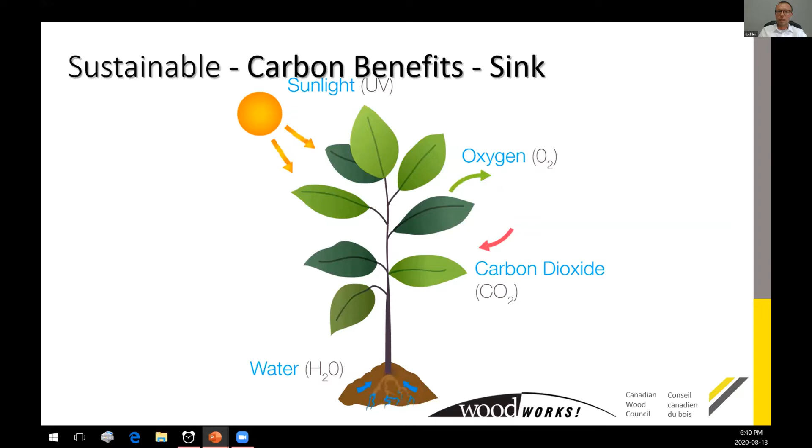As the trees grow, they absorb CO2 and release oxygen. It's important to remember that trees have a life cycle like any other organism. So if they die through natural means like insects, fire, or wind, they slowly decay and release the carbon that was stored. In fact, far more trees are destroyed through natural means than are harvested through forestry. It's not even close. So some forests are naturally actually a carbon source because of the decaying trees in nature.

If we can harvest them at the proper stage and replace them with young trees that absorb more carbon, we have a nice cycle that will allow us to produce building materials that will have this carbon stored for the life of the building. By ensuring the trees are replanted, the cycle will continue.

So why do we need to focus more on sustainable building materials? The population of the Earth right now is 7.5 billion, but projections say by 2050 we may have as many as 9.5 billion people on this planet, which is staggering, as you know, only about 60 years ago the population was approximately 3 billion people. So everyone needs places to live, to work, and to play.

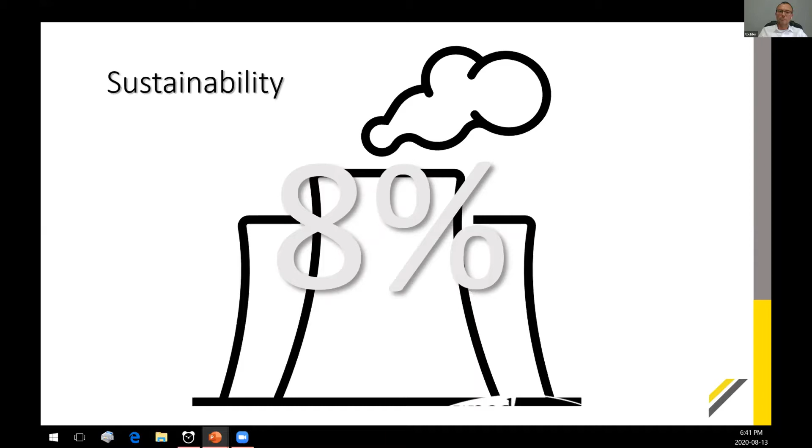In construction, concrete production is currently responsible for about 8% of the world's CO2 emissions, not far behind huge industries like agriculture. In fact, if concrete production were a country on its own, it would be in the top 5 producers. To put this in perspective, before travel lockdowns, the entire aviation industry was only responsible for about 2.5%.

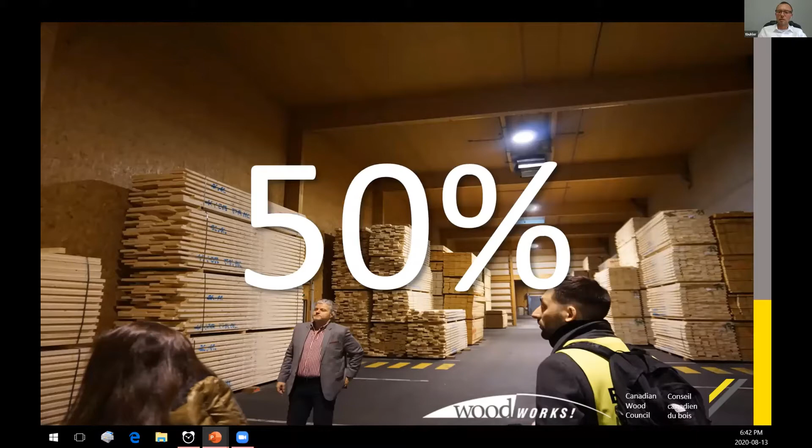The climate reports are out there, the evidence is crystal clear. So we've got to change the way we're building to keep up with these demands on the planet. Wood's dry mass is actually 50% carbon, so the more carbon we can retain in buildings, the less that's released into the environment, and perhaps this will lessen the impact of climate change, at least in the built industry, doing our part.

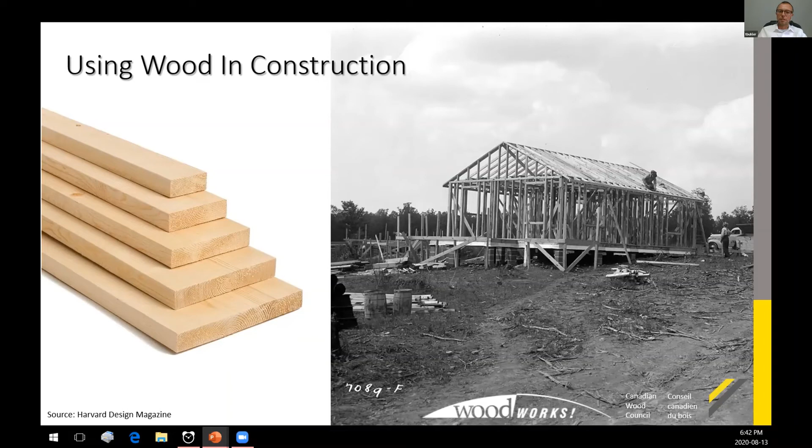Let's talk about using wood in construction and how we got to mass timber, which we're going to be talking about in depth tonight. Historically, we have built with wood because it was readily available, easy to work with, lightweight, and easily transportable. We started building with sticks, classified as dimensional lumber, 2x4s through 2x10s and so on, with planks used for sheathing. This worked reasonably well, but there were size limitations, and it's a very labor-intensive process, very much piece by piece.

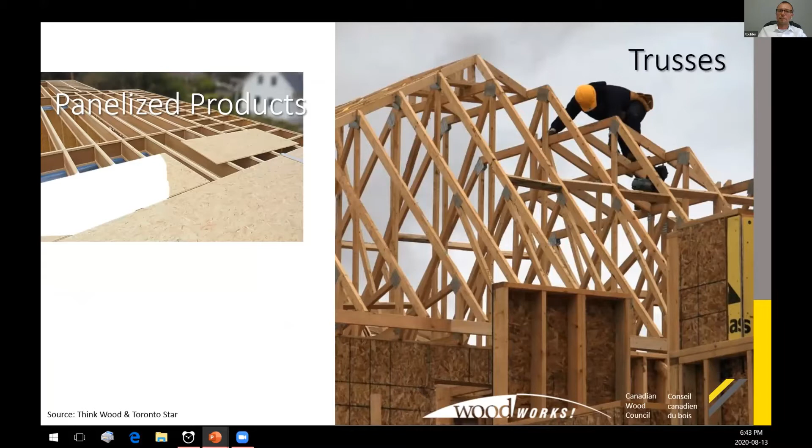So wood has developed along the way. Different products like engineered trusses allow us to achieve longer spans and have greater strengths. Panelized products like plywood and OSB allow us to cover our buildings more quickly. And engineered products like I-joists and other structural composite lumbers allow us to achieve greater spans and have stronger members.

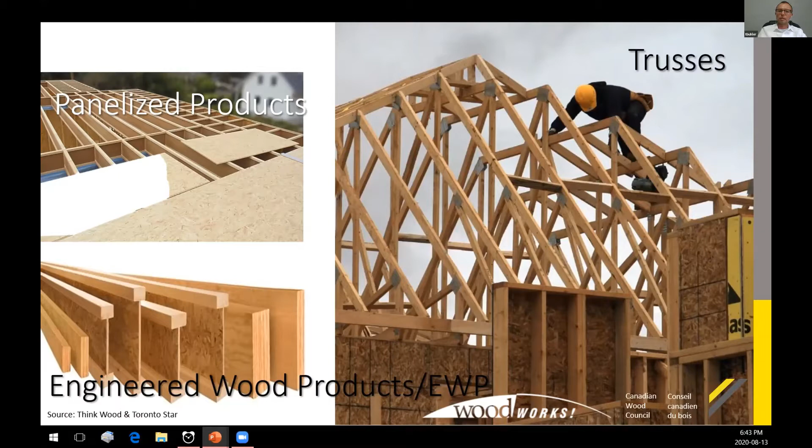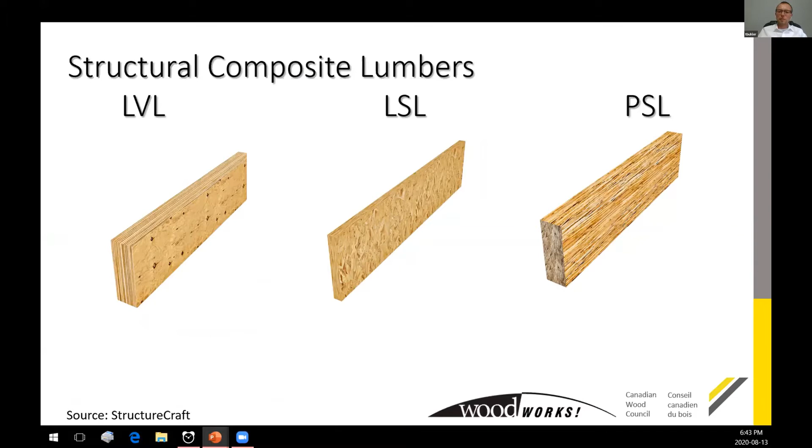Something worth mentioning, not generally included in the mass timber family or main players, are the structural composite lumbers, or SCLs - laminated veneer lumber, parallel strand lumber, and laminated strand lumber. It is somewhat of a mass timber product on its own that has a variety of advantages: they can be made to unlimited lengths in production, much lower moisture content and less prone to shrinkage, greater strength to weight ratio, increased resistance to fire, and less wasteful.

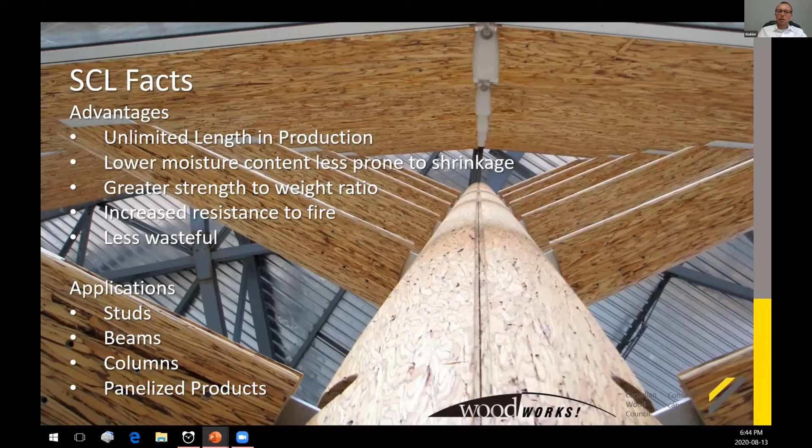You can only get so many 2x10s out of a round tree, but these structural composite lumbers use smaller pieces. These can be used in applications like studs, beams, columns, and panelized products. These have evolved over many years until we've kind of reached a maximum size with these types of products as well.

So this leads us into the mass timber discussion. Catching momentum in Canada and North America in recent years, this has been a popular type of construction since the early 90s in European countries, and even some examples in North America that we'll get into. But it's not quite as new as many people think, but certainly gaining a lot of popularity.

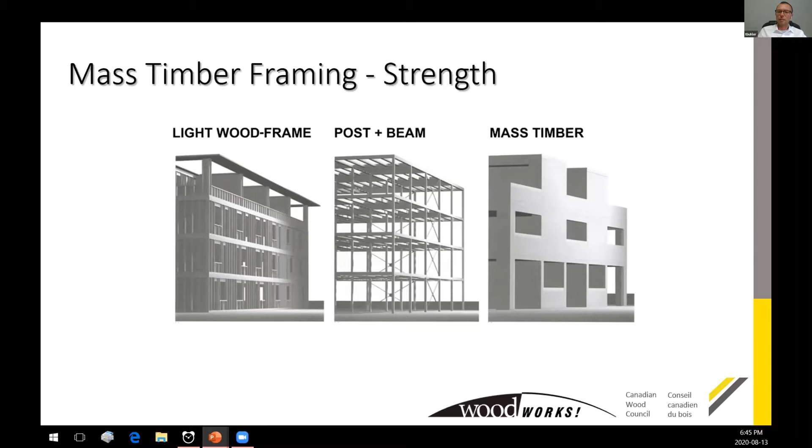The two main characteristics of mass timber that allow us to build these larger and taller buildings are the strength and the fire safety performance. The larger members have a greater load-bearing capacity than any dimensional lumber that we see. So wood, when exposed to fire in a mass timber application, behaves a little bit differently.

When exposed to fire, the outer layer will slowly burn, but it creates a natural protective charred layer. The char layer acts as insulation, which delays the onset of heating of the wood in the core that's making up the structural capacity of the building. The char will form at a very predictable rate of about 0.64 millimeters a minute, which will slow combustion and allow for evacuation. So you can easily design a sacrificial char layer into your building to ensure that you meet the fire resistance rating prescribed in various building codes.

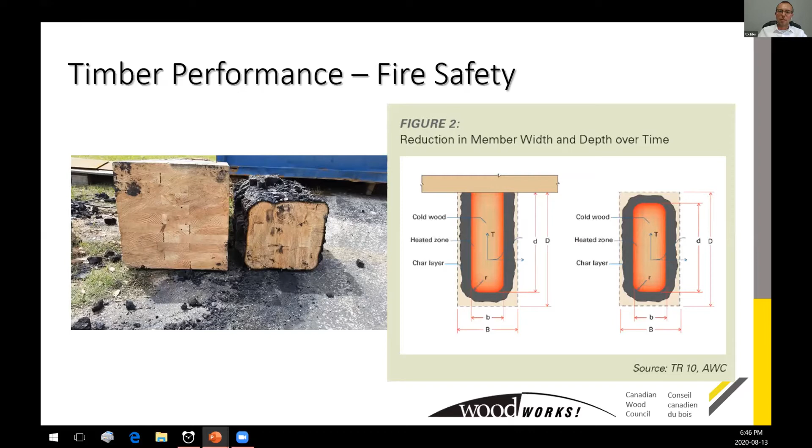Let's quickly get into the common mass timber products that you'll see. Glue laminated timber, typically known as GLT now, as most of these products will fit into a three-letter acronym. Glulam is composed of individual wood laminations specifically selected and positioned based on their performance characteristics, and they're bonded together with durable moisture-resistant adhesives. The grain of all laminations will run parallel with the length of the member, and the laminations reduce natural defects and mitigate some common challenges with wood construction.

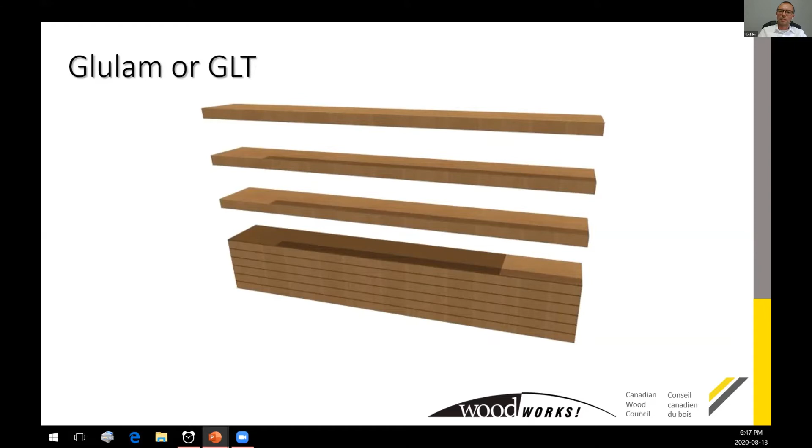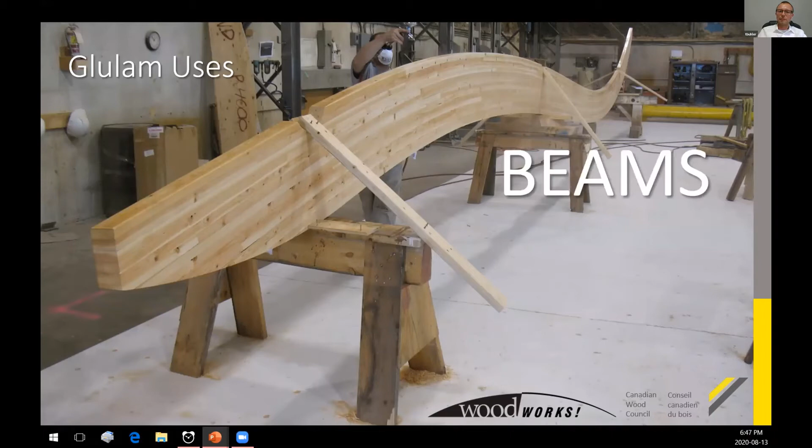GLT has been around a bit longer than some of the other products, typically used in showcase public buildings. I'm sure all of us at some point have been in an atrium or public space that has some glulam post and beam construction. Glulam has excellent strength and stiffness properties, can be made in a variety of layups, including curvatures as you see in the photo, and can be used for beams, columns, decking, and other applications. In fact, this particular project highlighted here is a glulam arch in Richmond, BC, part of the Olympic speed skating oval building that has a 100-meter clear span.

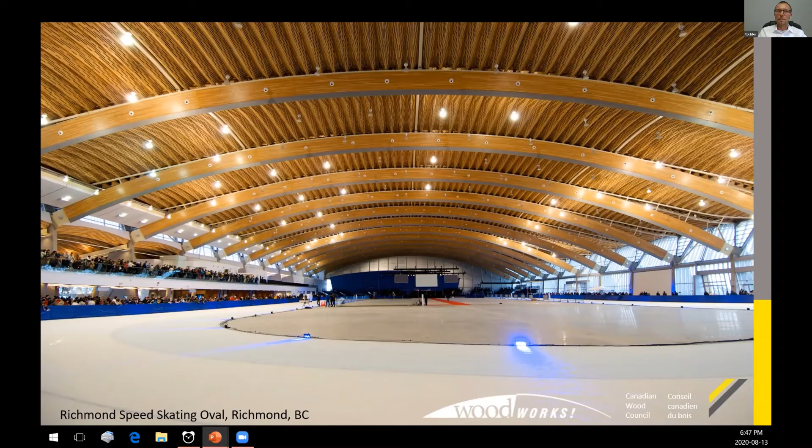The next product is cross-laminated timber, or CLT. It's an engineered wood panel, typically consisting of 3, 5, or 7 layers of dimensional lumber oriented at right angles to one another, and then glued to form structural panels with exceptional strength, dimensional stability, and rigidity.

The alternation of the laminations allows for strength in two directions, much like a concrete plate can offer. The odd-numbered laminations offer the greatest strength. This has been around for 30 years or so in Europe, and recently appearing in North America. Because of its ability to span in two directions, it's very well suited for floors and roof structures, and for mid-rise and tall wood construction.

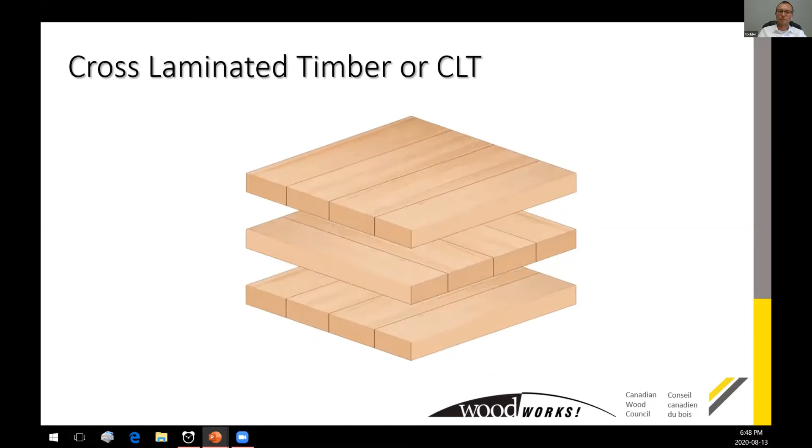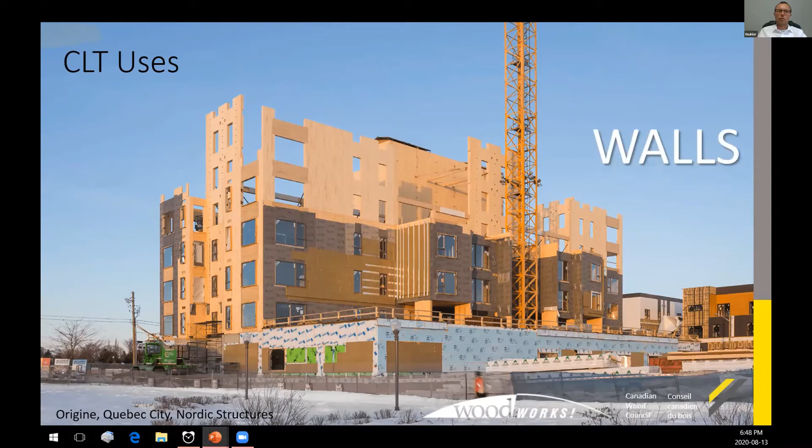This is an example of a building in Quebec City that is made entirely out of CLT, from panels as much as 9 plies in thickness. It was used for the walls, the floors, the roof, elevator shafts, and shear wall applications.

Nail laminated timber, or NLT, is actually over a 100-year-old construction method that is undergoing a design renaissance as part of the mass timber world. It can be found today in many historical buildings, especially in the Toronto area, in all shapes and sizes, with heavy timber post and beam construction, using nail laminated timber as a floor structure. This is just dimensional lumber nailed on edge. Obviously, it used to be nailed by hand in place a century ago, but now sophisticated nailing guns and automated machinery allow it to be manufactured to spec in a factory setting.

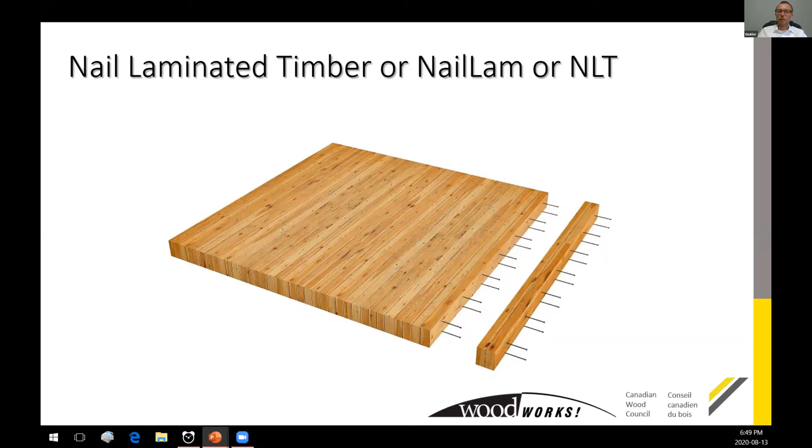A similar product to NLT with one important difference is dowel laminated timber, or DLT. Currently, this is the only all-wood mass timber product. Hardwood dowels are used with the softwood boards to friction fit the panel together, so it's particularly efficient for horizontal spans and allows for a lot of architectural flexibility. With no metal fasteners, the panels can easily be processed using CNC machinery, creating a high tolerance panel, which can also contain pre-integrated acoustic materials, electrical conduits, or other service interfaces.

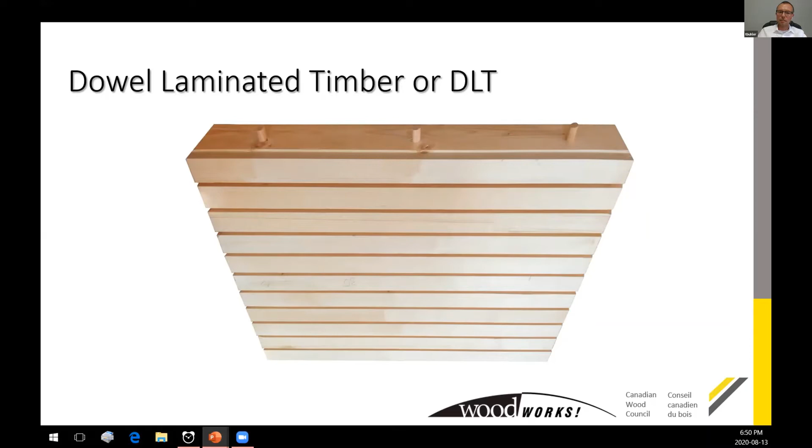This is currently just manufactured by StructureCraft in Canada, in British Columbia. Again, these panels can be used for floors, walls, roofs, and elevator shaft applications.

Now that we've learned a little bit about some of the mass timber products, when we look at the possibilities, it's really endless. If you can panelize these wood members, they can act like large plates and have two-way capacity if required. These are highly processed products where some of the natural defects that occur in wood, like checks, splits, knots, etc., can be removed and controlled, and the quality of the finished product can be assured. Moisture content can be monitored in the factory setting to mitigate shrinkage to a large degree.

Since you can CNC most of these panels quite easily, connections for MEP can already be installed and prefabricated. They can be shipped to a job site, due to their much less weight than steel or concrete, quite efficiently, and craned into place immediately. Now, suddenly you can erect the entire floor of an office building in a week with no formwork required, no rebar, or hundreds of concrete trucks. You don't have to wait weeks to strip the formwork, and you don't have to reshore.

You can use large portions of the structure for the finish and eliminate costly and time-consuming application of gypsum wallboard, and you're all set to go with a really beautiful looking project.

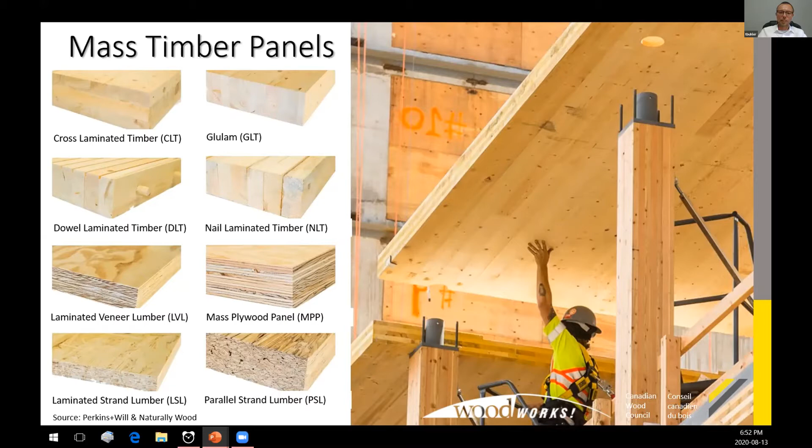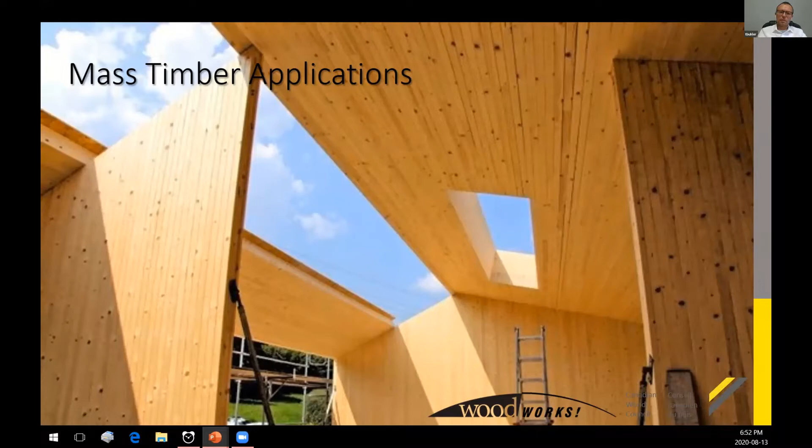A lot of people think we're trying to stretch skyscrapers out of wood, which are great, but many of these buildings, which I'll just flip through quickly, fit within the prescriptions of existing building codes, like a toy store, a furniture store, a grocery store, libraries, community center pools, office spaces, and even warehouses. So this allows us to have a lot more flexibility and a lot more types of buildings that we can really be proud of.

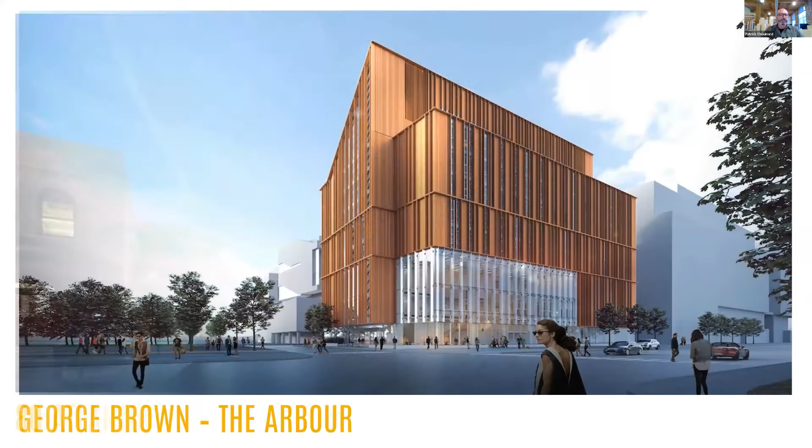George Brown College is building a 10-story building on the Toronto waterfront. The University of Toronto is building a 14-story building. Centennial College is building a 6-story building, and I'm sure Mark will talk a little bit more about this building since EllisDon has the contract for it.

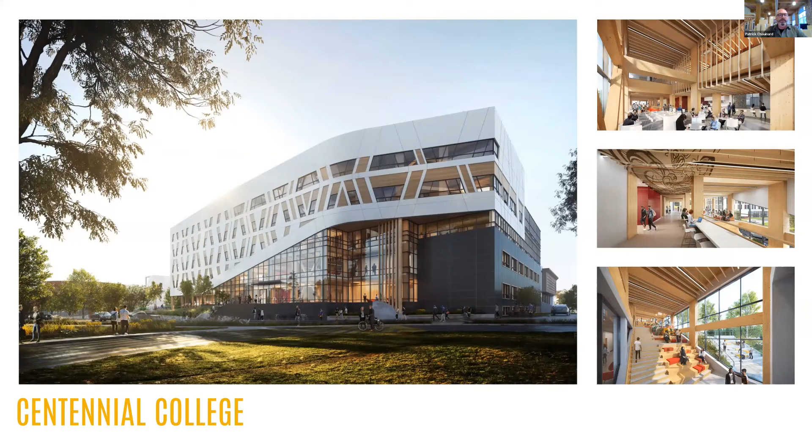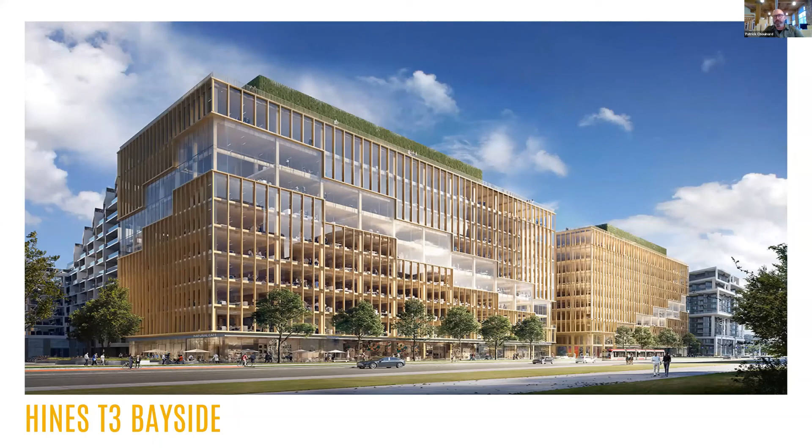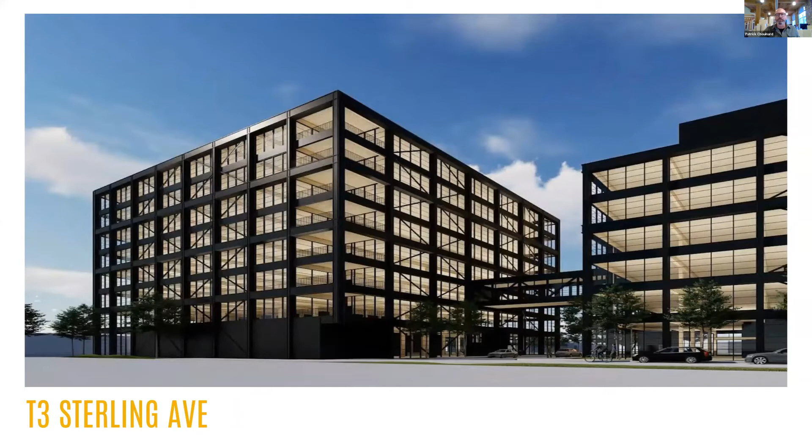So why all the interest in mass timber? Well, it really depends on who you're asking. If you're speaking with owners and developers, it's all about return on investment. Mass timber buildings have the propensity to be built at lower cost, and in addition, tenants are willing to pay a premium to be in these absolutely beautiful buildings. So the fact that you can build them at lower cost and get a higher premium means owners and developers are getting a higher return on their investment. Speed of construction, certainly - referring back to the Brock Commons building that was completely weather-tight in 9.5 weeks - the structure of these buildings goes up more quickly than conventionally constructed buildings.

In addition to the site work being done on a building, mass timber buildings are being constructed in a factory at the same time. When they're shipped to site, they're assembled rather than being constructed on site, so they go up much more quickly.

If you speak to the environmentalists, as Tim mentioned, it's all about the environmental benefits—carbon sequestration and using natural, renewable, sustainably harvested materials.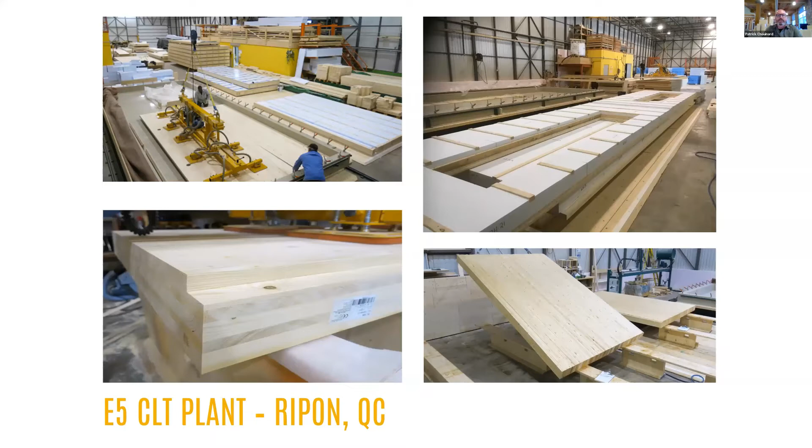So I was asked to talk a little bit about Element 5. We are a startup company, essentially. I started the company at the end of 2016, so we've been operational for less than 5 years.

One of the first things we did—fortunately we were able to buy the assets and all the equipment of a small CLT manufacturing company located in Ripon, Quebec, about an hour due east of Ottawa. It's a small facility, about 13,000 square feet.

This is CLT manufacturing 101. If you look at the top left-hand corner, you'll see a vacuum press—a bed where you lay the materials. You have automated glue applicators that put glue on the surface, then a rubber membrane that you drape across the bed and fasten down with fasteners around the outside, then suck the air out, which creates compression on the panels until the glue sets.

With this process, we can only manufacture about 3 panels per day, so it's a pretty slow process. Then we pick up the panels with the overhead gantry you see there, move them to other parts of the factory, and hand frame everything—using hand tools basically to cut everything to size and shape.

We quickly learned in this industry that there are very few architects and engineers who know how to design and engineer mass timber buildings. So we realized that if we wanted to ultimately sell something, we had to handhold these projects from early stage design through to the point where we could actually manufacture materials.

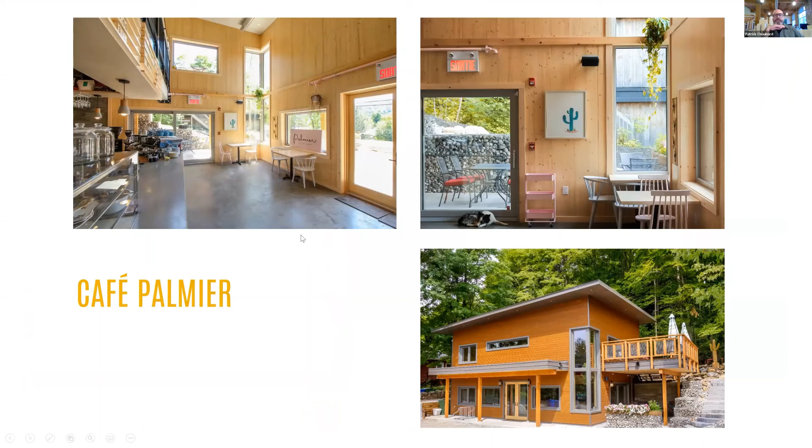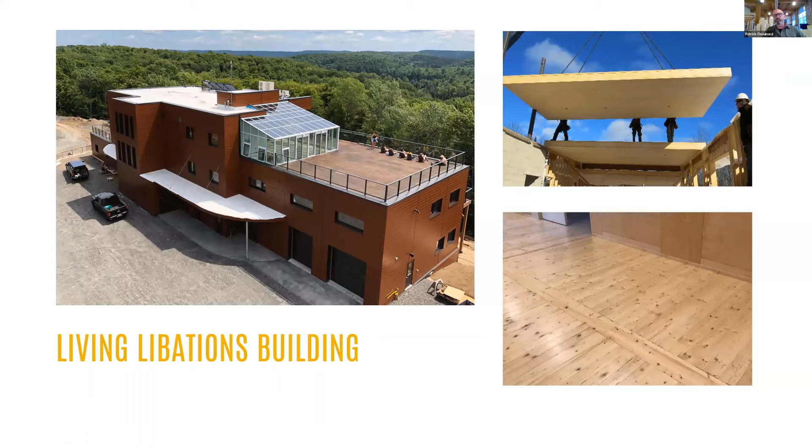This is called the Living Libations Building. One of the challenges with CLT is if you have to span long distances between structural members, you have to increase the thickness of the CLT considerably, and if we were to have sold strictly CLT for this project, it would have been cost prohibitive. So we came up with what we now call box panels. They're hollow core CLT panels with a CLT slab on the bottom and top, and an engineered joist in between, so these panels are actually hollow inside. They're actually stronger than CLT, and because they're hollow, it's a solution that's much more cost competitive against concrete.

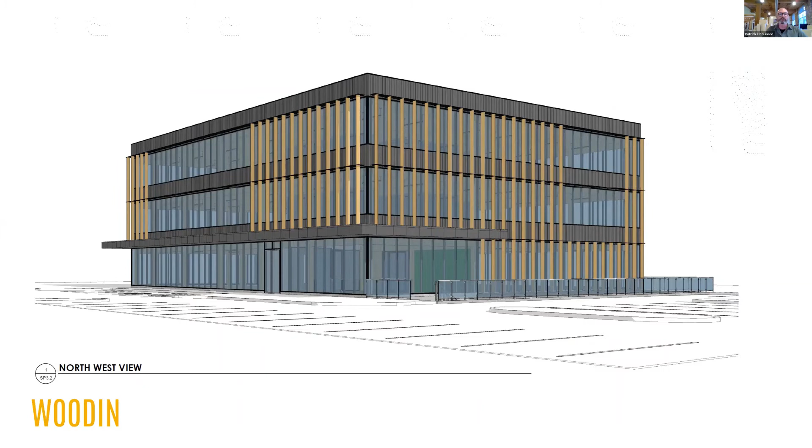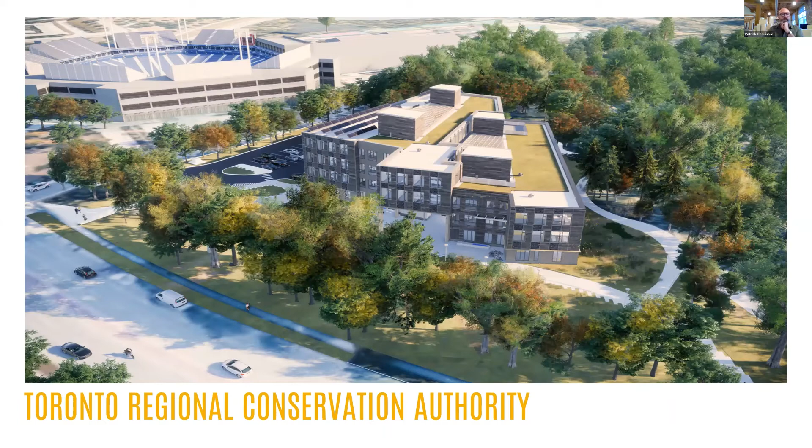We continue along the vein of selling into First Nations communities, and this is an Aboriginal healthcare center in London, Ontario, which we are delivering again this fall. The largest project we have won so far is the Toronto Regional Conservation Authority—an 80,000 square foot post and beam structure—and we are delivering and erecting it in mid-November of this year.

We had always had our sights set on a larger building in Ontario for the larger market space. We honestly believe Ontario will become a center for the mass timber industry, at least across the whole eastern half of North America. We see tremendous opportunities to sell buildings into the central United States and the whole eastern seaboard, so there are many opportunities currently in our pipeline.

About 2.5 years ago, we started working on the construction of a new plant. These are photographs taken just the other day. It's a 133,000 square foot building, with a capacity of about 45,000 cubic meters of CLT and 5,000 cubic meters of glulam—the equivalent of about 8 Brock Commons buildings per year. It will employ about 50 people directly and create about 240 jobs in related manufacturing, sawmills, transportation, and logging sectors.

So again, thank you very much, Nick and Raymond, for the opportunity to present. I will be in one of the breakout sessions, I think room 3, and look forward to answering any additional questions you may have.

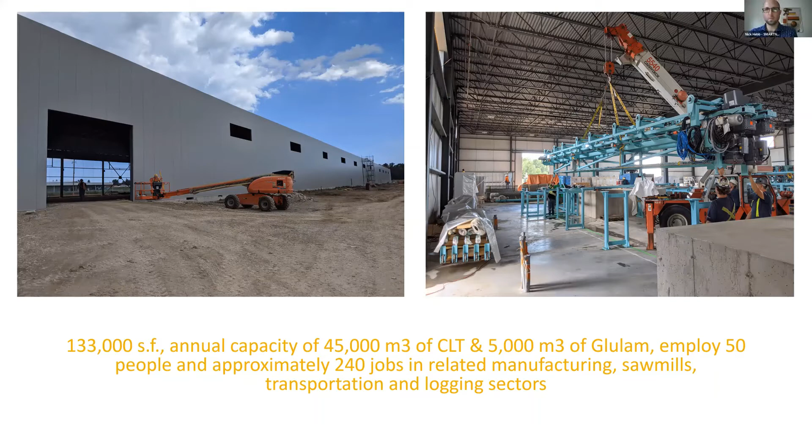Thanks so much, Patrick. We're going to put you in room 2 for that. But it's nice to hear about what you're doing with Element 5—congrats on the new factory. Some amazing projects there. We certainly hope to see it expand across Ontario and across Canada. It'd be nice to get a project in Ottawa. And it's fairly ironic that you're doing some of the fire halls too—who would have thought they'd start building those out of wood? Fabulous looking projects, and looking forward to hearing more about what you're up to in the breakout room. All right, thank you very much.

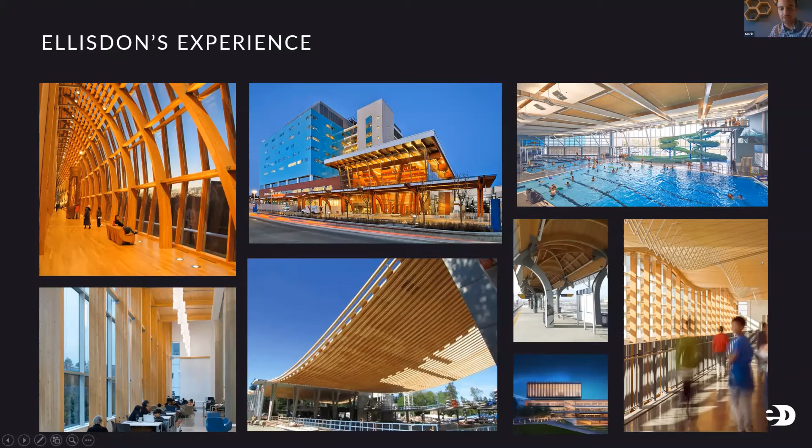Then some things started changing around the 2014, 2015 time period. A lot of that had to do with building code, and a lot of that had to do with the supply chain as well, including Patrick's company and some others. So that's where we were up until about 2014, 2015.

So what's happening now at ELLISDON? I'm on the construction scientist team. We're kind of like the R&D engine of the company. We're supposed to keep this big construction company at the cutting edge of emerging technology and what's coming down the pipe. And of course, we got the call on mass timber and we had to try to figure it out. So where we brought the company to today, from doing a lot of that small boutique stuff, here's what's going on to date.

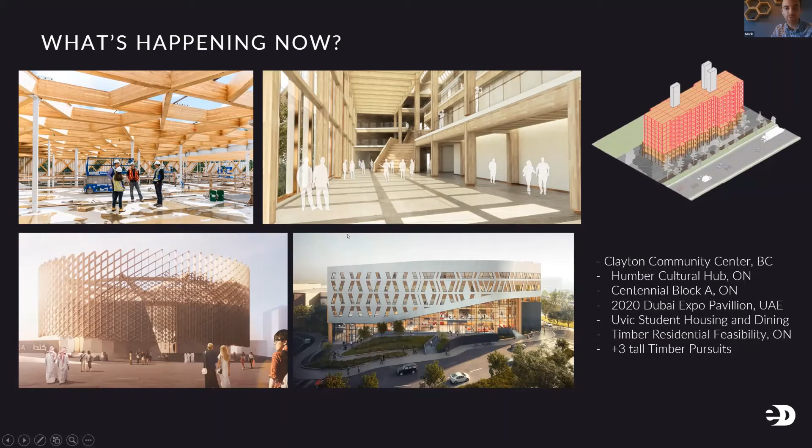So lots of mass timber. These are the ones that are unveiled to date. Lots more in the pipeline, very interesting pursuits and research projects on the go with partners around the country and around the world. So that's what's happening now. As you can see, we're moving from that boutique kind of setup into something more ubiquitous, where we're just replacing where you would traditionally use steel or concrete. That's really the trend around the world. These are all real buildings, and the numbers here indicate how tall they're going. So we're feeding the lower rise stuff, while at the same time inching upwards into some of the other markets which have traditionally been entirely dominated by concrete and steel. There's a number of reasons for this, which the other presenters eloquently went through. Tim did a great job of explaining the acronyms.

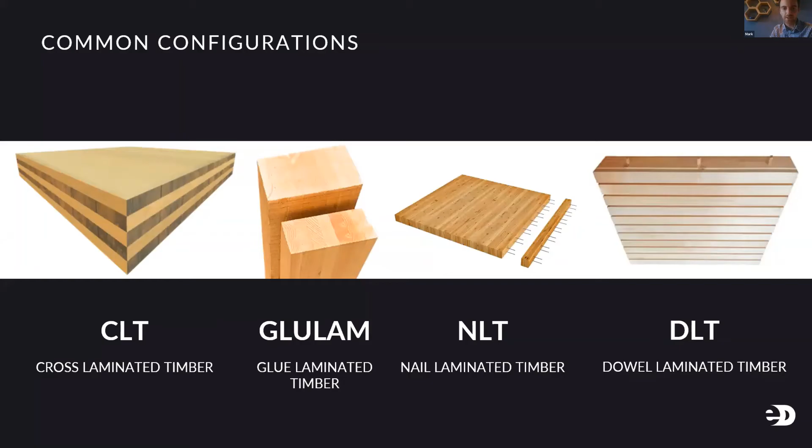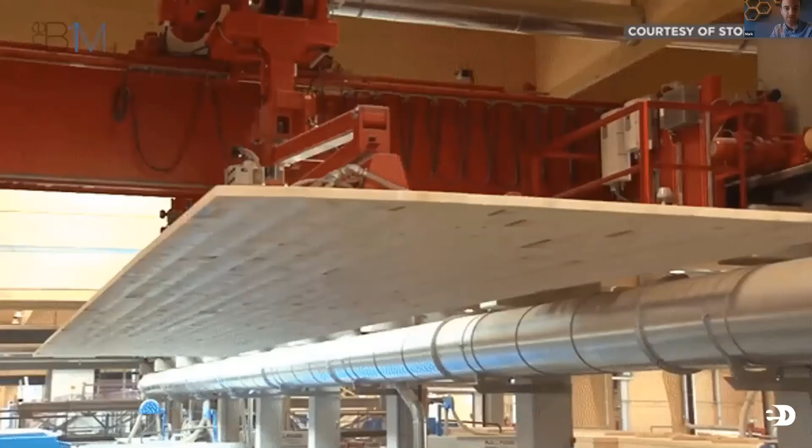We won't have to do that here, but I wanted to show you how this stuff is made. It all kind of starts similar to what you'd think of as dimensional lumber you'd get at a hardware store - small pieces, but then those are assembled into larger pieces, stacked layer by layer.

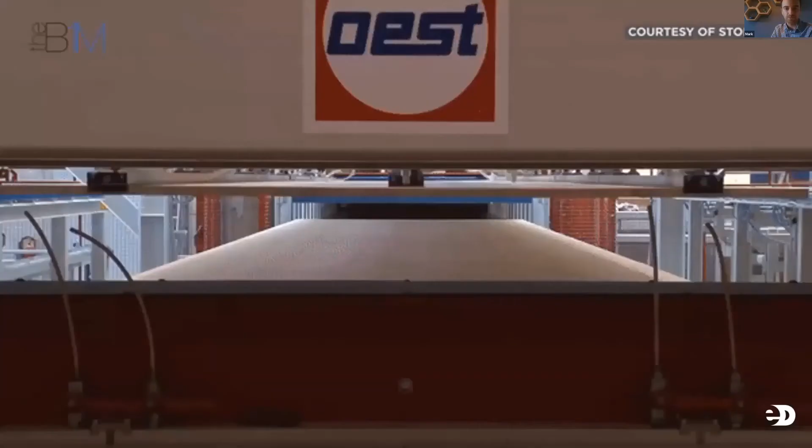This is what's going on inside the plants that produce this stuff. You can see glue layers go in between. This element we're watching is like a piece of CLT, the cross-laminated stuff. It gets put into a press, and shortly thereafter comes out - now essentially what we've done is assembled all of these small pieces into a bus-sized piece of wood, which can be used in all sorts of applications.

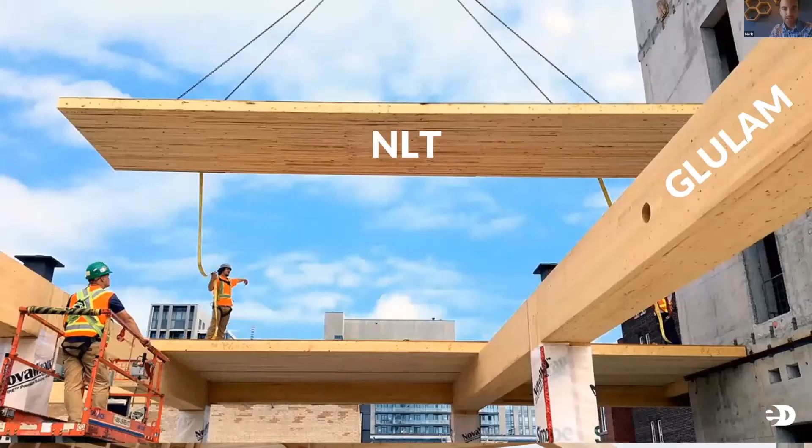Important to note, these products are always used in combination where they make the most sense. Cross-laminated timber happens to be pretty good as a floor panel and shear walls. Glulam is very good axially, just because of the orientation of the grain. NLT as well, used in combination with other things. You'll notice in the back of this photo a big concrete core.

It's important to note that just because you're doing a timber building doesn't necessarily mean it's all going to be timber, or that it should all be timber. We don't have to necessarily be purists about this - there's a lot of good reasons to use different materials where they make the most sense. This was a case in Toronto where they used a concrete elevator and stair shafts.

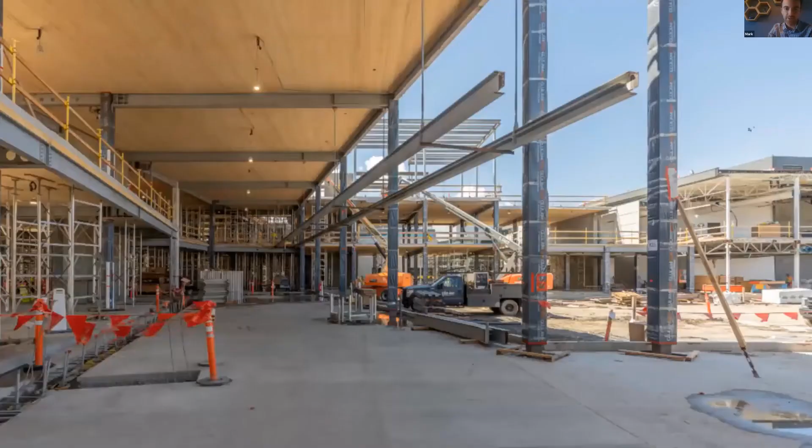Hybrid buildings make a lot of sense too. This was the completion photo of what Patrick showed earlier, the one he built on Golden Avenue. Steel hybrids are very common in certain parts of the world and becoming more common here, and there's good financial reasons for that, as well as some other considerations around headroom, material availability, and supply chain constraints.

It's just good to keep in mind that we're kind of adding a material to the menu that you can select from. You don't necessarily have to choose one though - there's good sense in choosing a few for certain applications. Happy to get into the weeds on that if anyone wants to chat later.

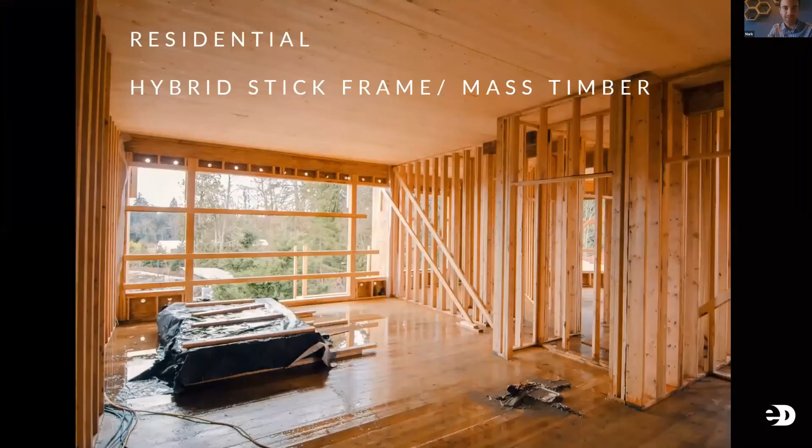Also, it's not reserved for big buildings or commercial buildings. There's a lot of mass timber entering the more traditional light wood frame world. So in this photo here, you can see a 6-story residential building on the West Coast where normally we'd see 2x4, 2x6 walls, and also TJI wood joists across the ceiling in a conventional kind of wood construction of a residence.

This was an application where it was a little bit of a remote job - this actually wasn't an EllisDon job, but the developer swapped out all of the horizontal elements for mass timber, which enabled them to stand up the walls prefab and throw down all of the mass timber much quicker than you'd be able to assemble TJI joists. Things like that can start making sense depending on labor availability and your proximity to different suppliers. But there's lots of good applications in the residential world at all kinds of densities, even down into the 4 and 6 stories.

So the rest of this series of slides is just a bunch of considerations. I sit at the contractor's perspective, so we see projects holistically and the things that matter to our clients holistically. I'll try to run through some of those and how it really impacts the construction process.

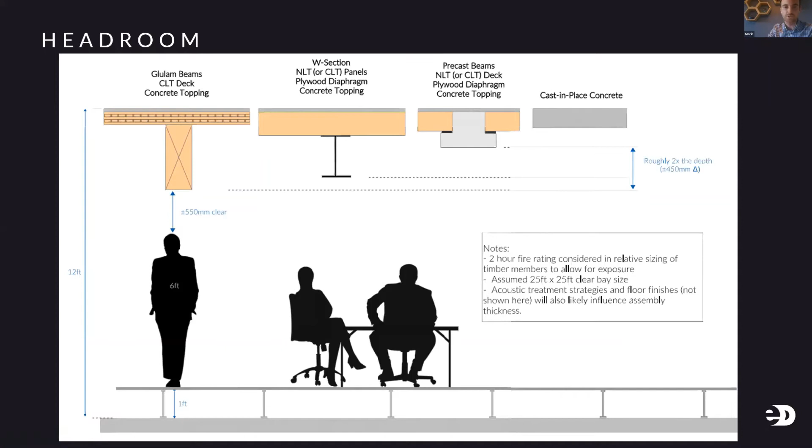So things you would want to think about if you're conceiving a job: headroom. There's a lot of systems out there - I'm only showing a few here, but there's a half dozen others easily. The depth of the system sometimes matters to the client, and depending on the system you choose it could change the depth of the system overall, which is something to think about.

The grid spacing - there's a lot of different options, I would say, here. There's box panels, whether you do CLT or glulam floors would also change this grid spacing. It's just important to note that there's an optimization exercise that generally has to take place before you conceive things like your grid.

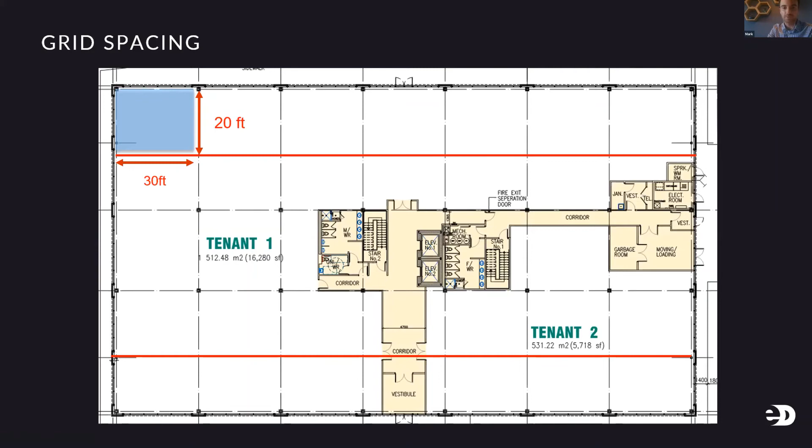If you just select a grid, you won't necessarily be optimized for one product or another. So it's good to have all your objectives at the table, and you can start pulling in those key stakeholders that can advise on what makes the most sense. If the grid shown here fits well for steel, that would give you the best bang for your buck for steel, but different grids might give you a better price for timber or concrete, or vice versa.

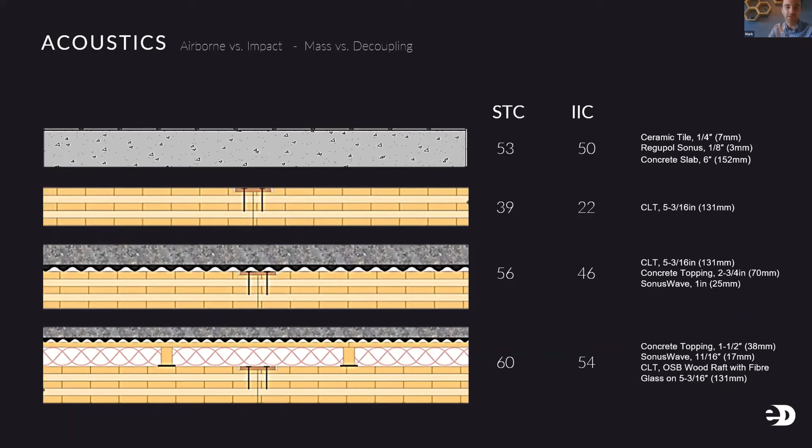Acoustics wasn't mentioned too much so far, but it's a very important issue in the mass timber world, simply because people love seeing the wood. And if the wood is also the structure, you're left with treating acoustics elsewhere, and oftentimes that means above the wood, on top of your floors. So we end up looking at a whole host of different systems, from toppings to membranes to what we call the concrete topping, like a wet trade. You pour it wet, but there are also dry options out there that can be effective and cost effective even. Acoustics are a challenge, especially in residential, because if you want to see wood in your bedroom and there's a bedroom right above it, we need to make sure you're also not hearing when the person above you gets up out of bed. So those are a couple of considerations.

We talked about how controlled and precise it is. The nice thing is, we build a lot of concrete buildings traditionally, and there's this conversion step where the architect usually designs everything in 3D, but then translates it down to 2 dimensions so that someone on site can read the drawing and build the formwork. And then the formwork translates it back to 3D. So there's this conversion step that always takes place between 2D and 3D, and it can be a source of error and poor tolerances sometimes. The nice thing about wood is that the designers, engineers, and architects' models speak directly to these machines, so that conversion step doesn't exist, and that source of error gets removed. It's really nice to be able to design for manufacturing.

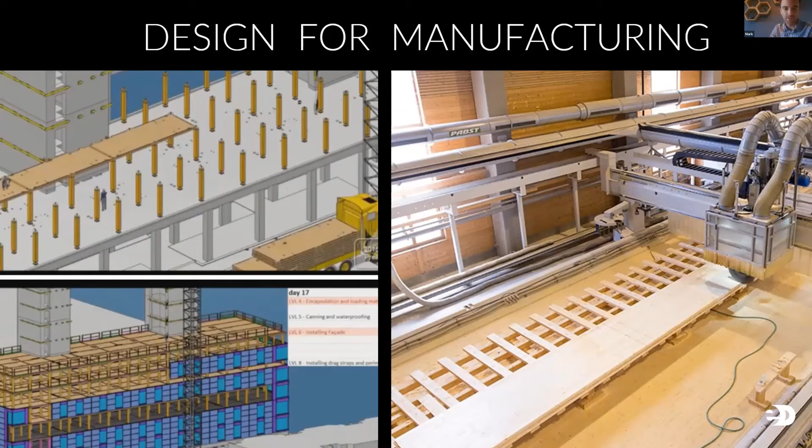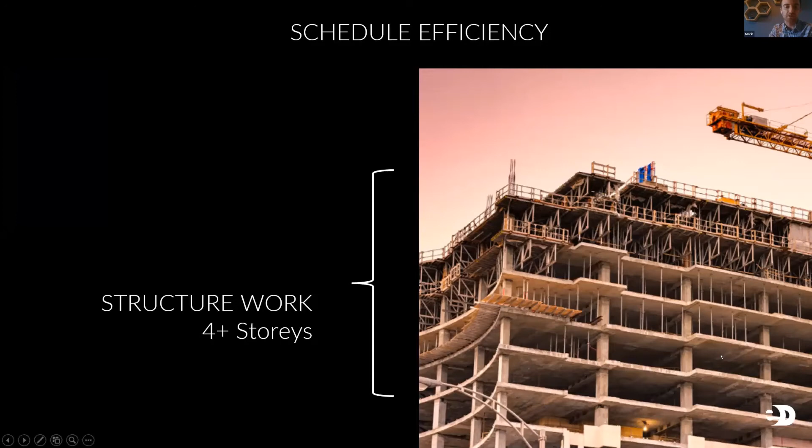Let's talk about construction sites becoming assembly sites. Here's one of the cruxes of it: in a concrete building, you have all these posts that hold up the floors while the concrete's coming to strength. You see that as you drive around different cities. With wood, you don't have that - the wood comes to site full strength. So you can start your next activity a little bit sooner, say 3 to 4 weeks sooner.

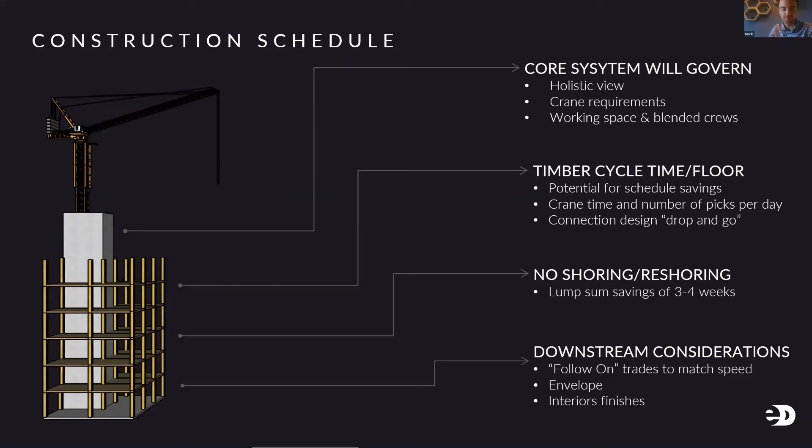This is a bit too much to go into in detail, but the point is that although wood can move really fast, it's important to speak about the whole project. How fast is the project moving? If the wood moves fast, the only way we're going to make our project actually end earlier, which is what the client really cares about, is if we find ways to accelerate everything else. The wood is probably one of the first 4 or 5 activities that happen on site - there's at least another 35 to 40 afterwards, and if they move at the conventional rate, the project's probably going to end on the same day. So a lot of our focus is figuring out ways to optimize downstream trades and find ways to move them along at a rate that justifies the use of the wood, or at least so we can capitalize on some of the speed. It's pretty straightforward though - the wood only moves as fast as your crane moves, and we can get into a lot of analysis about that.

Costs are another huge topic. It's usually the only thing anyone cares about when you start talking about the very big buildings where institutional developers are looking at bottom lines. It's very case by case - depends on what market you're in, depends on what you're building.

The important thing to know is that by switching from, say, concrete to wood, you're not just changing one line item, you're actually changing every line item of your budget. Some get more expensive, maybe your mechanical system, because you have to change your fire suppression, HVAC, or electrical system. Some get cheaper - your foundations might be lighter, you don't have the drywall scope you would normally. So it's a big balancing act, a lot of up and down arrows to determine if there's an overall cost premium. We spend a lot of our time figuring out those details.

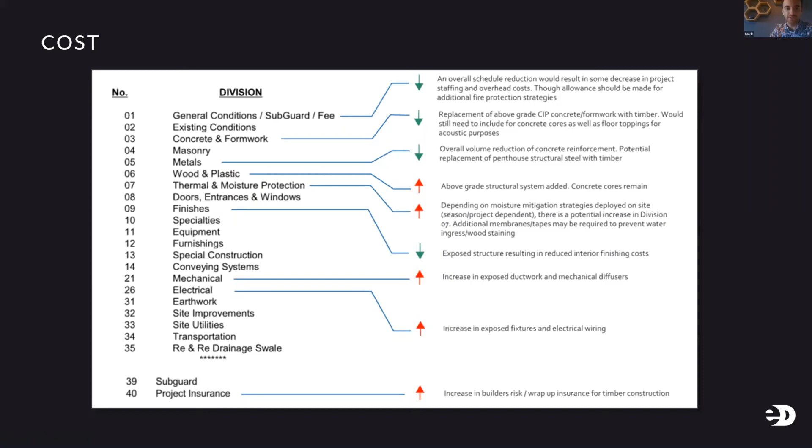I'm happy to go through the numbers with anyone afterwards. This is a little bit too detailed, so I'm going to skip over that one.

There's a lot of code implications depending on how tall of a building we want, and this varies depending on where you are in the country. But the gist of it is, if you're below 6 stories, it's a lot easier. If you're between 7 and 12 stories, there are some rules you can follow which make it easy. And if you go above 12, you're into a situation called an alternative solution, which is not the end of the world - it's been done many times. It adds some complexity and cost, but not deal breakers. There's lots of precedent being set at all of these levels today.

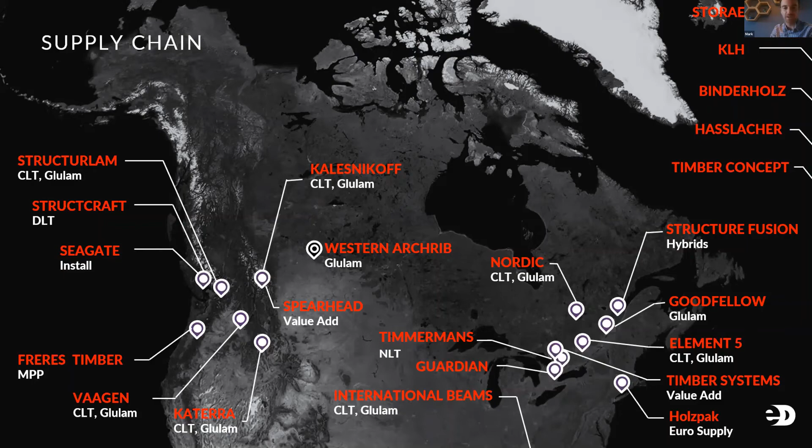Of course the European market exists, and they have some capacity and some years on us in terms of building up that capacity. So there's a lot of interesting options, a lot of projects that get supplied from Europe or a combination of domestic and Europe - a lot of interesting things we can talk about there.

So a couple last points here. How does this change your construction site? Well, we have to care a lot more about rainwater. Usually we just let our concrete structures get rained on because it's not going to do any harm to the concrete, but we have to be a lot more deliberate with how we manage water on our sites, given that they're wood structures. Why is this? Well, we want to avoid a couple of really bad things that we wouldn't want to happen, like any kind of decay or mold.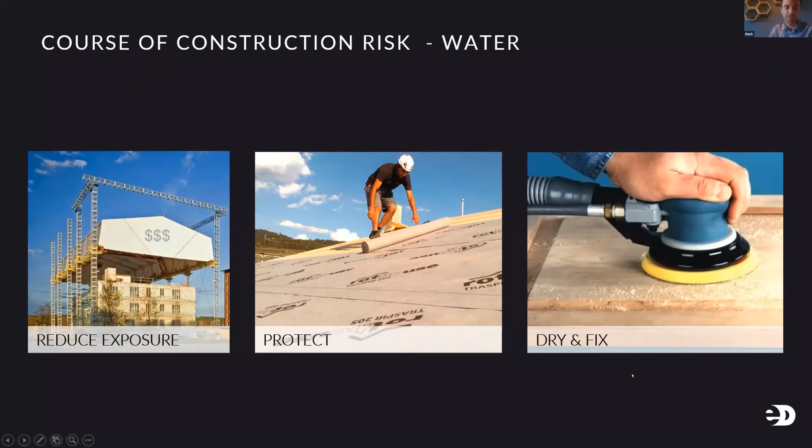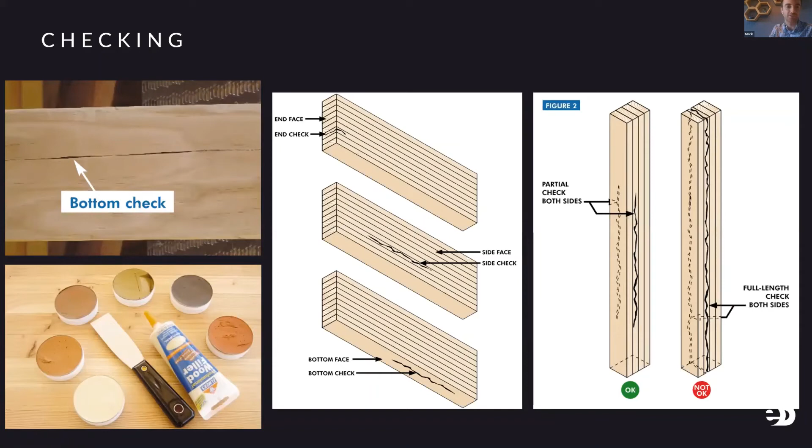Checking is something that happens in these wood buildings, and sometimes people see cracks in wood and think it's such a bad thing, but it's a very naturally occurring phenomenon in these wood products. It's not a structural issue almost 10 times out of 10, and there's all kinds of engineering, guides, and things to figure it out. You don't have to phone your structural engineer in the middle of the night to wake them up.

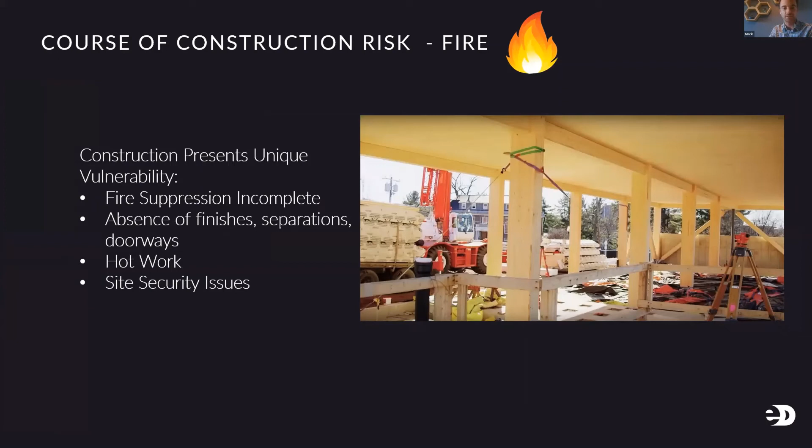Fire is another important thing on our site. We implement a number of strategies anyway, but they become very important on a wood site, like taking the welding off site and increasing security.

The last point I wanted to make was to reinforce the carbon piece that Tim brought up earlier. There are really two pieces here: Tim reinforced the stored, sequestered carbon in the wood, which is a good thing we want to maximize. The other piece is embodied carbon. It doesn't matter what material we use, steel, concrete, or wood, there's an associated embodied carbon piece with it. It takes energy for sawmills, trucks still driving, there's a carbon penalty to that. The point is that the embodied carbon of a single element of wood, like an equivalent column, is significantly less than equivalent steel or concrete.

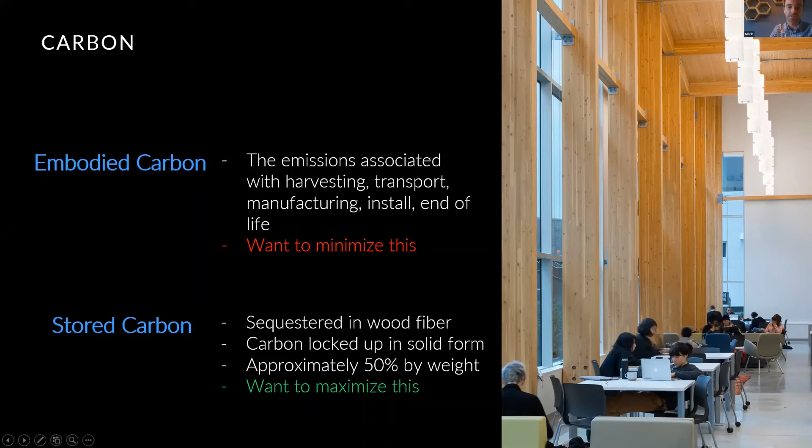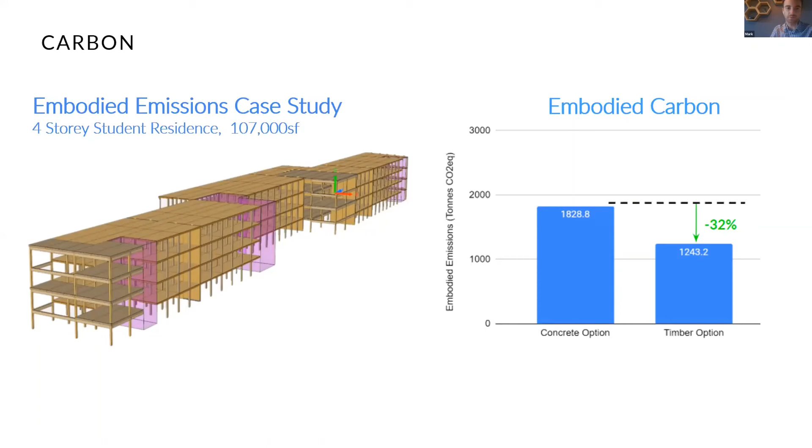So how much less? What's the issue here? We've done a whole bunch of life cycle analysis on this at the building scale, taking into account a lot of things. It comes out to about 30% less embodied carbon alone, and this is ignoring the sequestered benefit raised earlier. So even without taking advantage of that sequestered number, we still come out ahead on a carbon balance. That's important, and something we reinforce to clients considering this. This is an example of a building where that calculation made the difference between selecting a wood system versus an alternate. It's becoming more and more important moving forward.

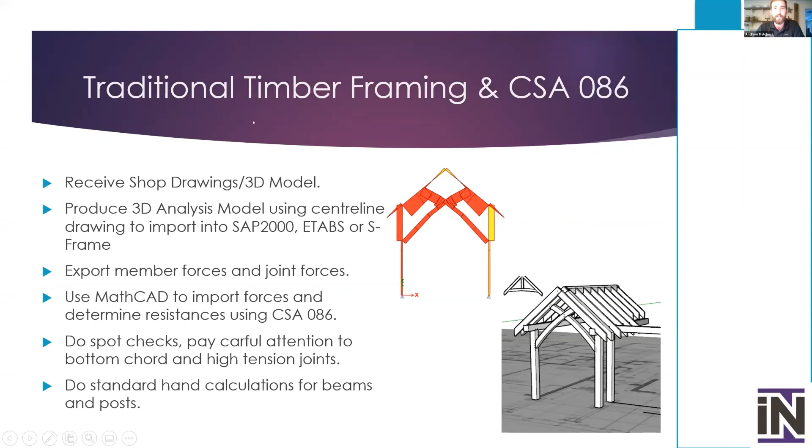So we do model in the software, but we also do hand calculations as well in engineering practices. Here's what we kind of do in MathCAD. I have all this pre-programmed - I think I have almost all of CSA 086, engineering design in wood, pre-programmed in MathCAD right now.

And it's just as simple as putting in lengths, spans, and member sizes until one of those structural analysis softwares catches up and we can do it inside the software. Waiting for that still, but hopefully someday.

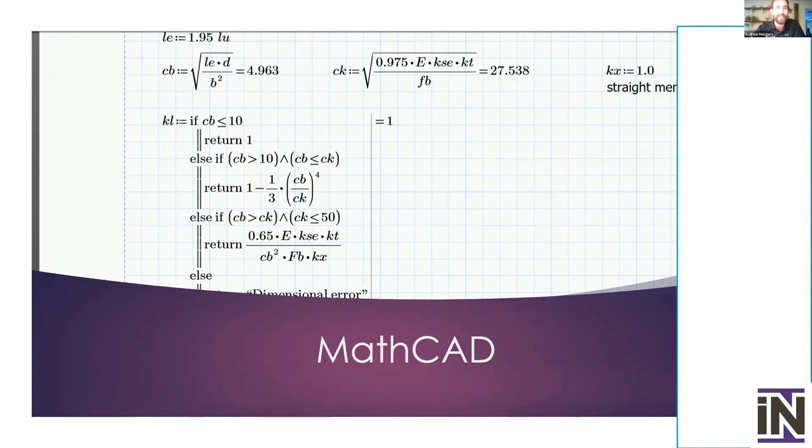So there are a lot of code challenges. I think Mark touched on that a little bit. It's kind of tricky. In a small town engineering firm, we skirt the line between real building design and part 9. Part 9 is for small buildings and houses, and it's a prescriptive based performance. So that's where you get your architectural designers - they can do structural design as long as their beams don't span more than 4.5 meters.

So we kind of skirt that line, trying to figure out what's part 9, what's part 4, which is like a structural engineering realm. And a lot of these timber frame structures are hybrid, so we kind of mix light frame walls with timber frame grand entrances.

And so it's a bit of a challenge, but I absolutely love working with timber. I think it's beautiful when it comes out at the end, and that's kind of what I'm working towards personally to specialize in.

Also, the great thing about timber frame structures is you can't put an architectural seal on it, so it has to be designed by a structural engineer. So it's also a great niche to become part of.

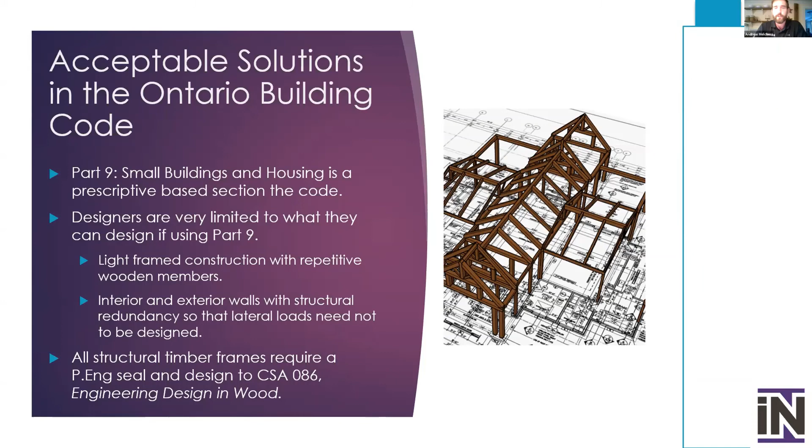And I was like, why would we put an ugly steel building on it? But unfortunately, the price difference was a little bit too high, so they put an ugly steel building over top of it. But the steel above the roof, water condenses on it and drips on the ice and causes imperfections in the ice surface. So if they went to wood, we wouldn't have had that problem. Not to say I was right, but probably should have went with wood.

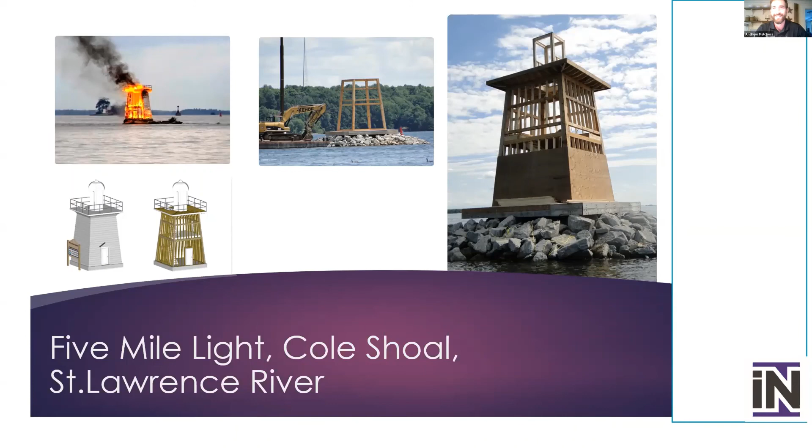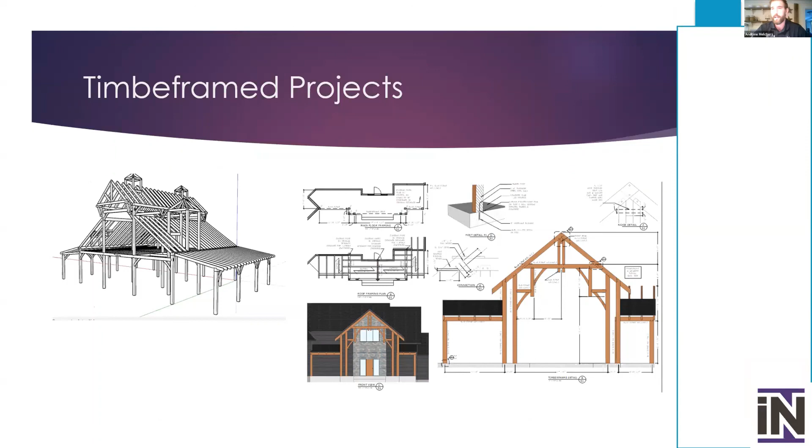So going on to historic buildings. Historic buildings are a challenge when it comes to wood, and it's something I'm working to solve. I forget the exact year, but I think it was in the 70s, the Canadian Standards Association came up with lumber grading certification.

That ensures the quality of the wood is good enough to use for structure. But it also means every building built before 1970, from an engineering perspective, is technically not usable because it's all ungraded lumber. So you go into a 100-year-old building, it's ungraded lumber, and if we're going to renovate this, I can't use it structurally. So we either have to bin it in place or tear down the building. That's why you see a lot of these historic buildings getting torn down—structurally there's no way to save it.

The other challenge is timber framers have to source their lumber from a graded source. So they can't go out, cut down that 100-foot jack pine and turn it into a beam, because it's ungraded. All the lumber graders are located where the sawmills are, and they don't really do house calls for a small engineering project. This is a huge challenge that I face on a regular basis.

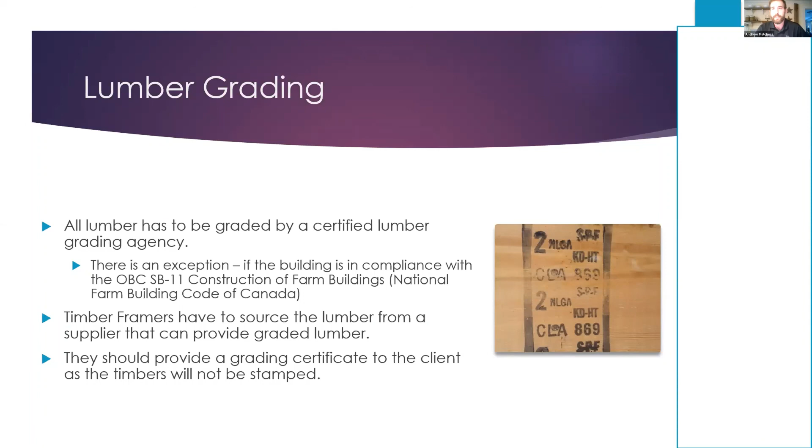I'm working on another project where there are just little timber frame accents that are mildly load bearing, but the contractor sourced ungraded lumber. I've been after the contractor like, this lumber has to be graded or I can't put my stamp on it. They actually had to pay to have a lumber grader from Northern Ontario drive down to Brockville to grade the lumber on site. I don't know how much that cost, but that's not fair to the contractor either. So that's a huge challenge we face and something I'm working to solve.

In the 80s, the NLGA standards started. We divided everything up into species and grade so we could do it structurally. One cool note I rely on a lot: if the building is older than the 1860s, it's probably local Eastern Ontario lumber—not garbage, but northern species, which is the least strong lumber.

But if it's after the 1860s, you can start suspecting, well, maybe it's Douglas fir. I am not a lumber grader, but I'll get on that in a minute. One really interesting thing: SPF lumber you get at the hardware store, spruce pine fir, that's what SPF stands for, but Eastern white pine is not categorized under spruce pine fir. It's actually a northern species. Spruce pine fir all comes from the West Coast.

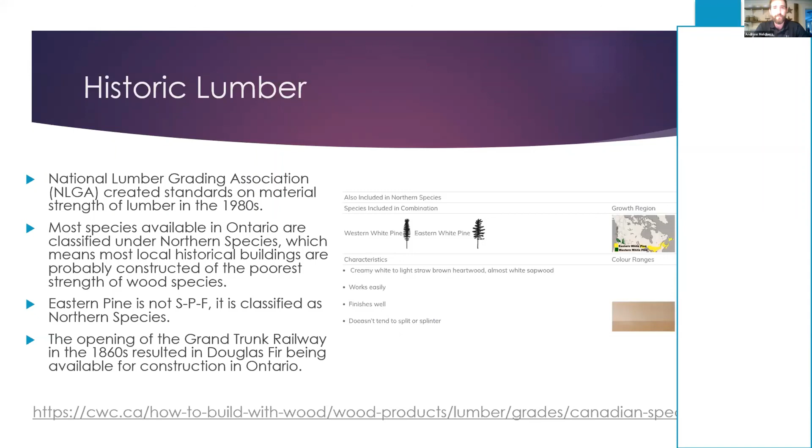So when you're talking about embodied carbon, a lot of that lumber is coming from the West Coast. That's one thing a lot of designers get hung up on, like, well, it's pine, it's SPF. It's not. Yeah, so when you're renovating an old building, there's some code stuff. You can grandfather it, people say, under Part 11. But if you're increasing the loads or the occupancy or changing things around, all of a sudden all that ungraded lumber is no longer useful.

The National Lumber Grading Association, they don't do field inspection. So if you're trying to save an old historic building, they're not going to come there and grade every single piece of lumber. There are alternate compliance paths you can use, where you can field test every single stud or every single joist, but that's not economically feasible most of the time.

And then the funny thing too is a lot of these old buildings are federal buildings, and they fall under the National Building Code, which does not have a grandfather clause. I'm actually an Army reservist at the Brockville Rifles, and our building is going under major renovation. Because we can't grandfather everything in, from my perspective I'm just like, this is crazy, but that's just what the building codes allow.

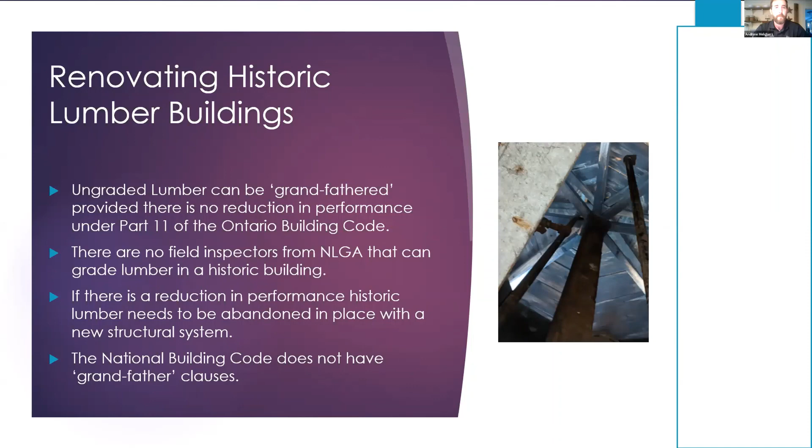So some limitations and how I'm trying to solve those. Lumber grading is super difficult for an engineer to get an old building passed. I've actually been in talks with the lumber grading associations in the area, and I'm trying to enable structural engineers to be able to field grade lumber. There's a few things I've got to work for. This is probably going to be a lifelong project, but I'd like to think that by the end of this project we can start saving more historic buildings by allowing structural engineers to grade lumber.

The Engineering Design in Wood code is focused on softwood species, so theoretically I can't use any hardwood for anything structural, which I think is a little bit interesting. And then just getting into more complex engineering, like partial fixity of timber frame connections - in a steel connection we can do partial fixity and really design efficiently. But in timber, we can't quite do that yet under CSA 086, at least I haven't found a way. So those are some limitations I'm working on.

It's a challenge I'm about to take on. As you can see, I'm pretty young and I've got lots of time to figure this stuff out. So that's the end of my talk. There's some contact information, feel free to reach out. And if you want to chat more about small town timber frame projects, meet me in one of the breakout rooms.

Thanks so much, Andrew. Definitely excited to hear about some of your projects there. Nice to see some small scale stuff, and that there's still space for that. I'd definitely be excited to check out that Airbnb. Absolutely, sign me up for that. That could be a good getaway. Striking photo of that on fire too. And thanks for bringing up the codes too. Perhaps you can go a little deeper in your breakout room, anybody who's interested to talk about the building codes, because I know that's something that's potentially holding some innovation back. That may be a good topic in your breakout room.